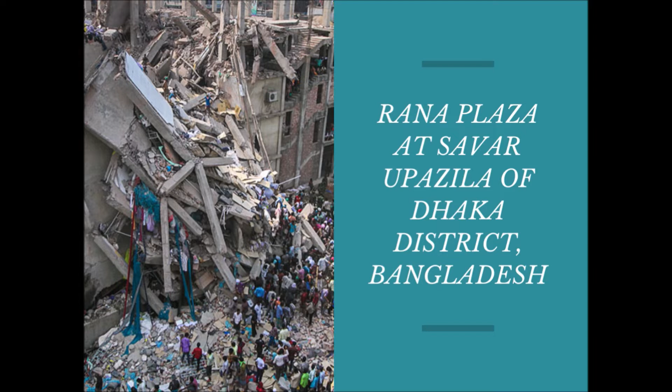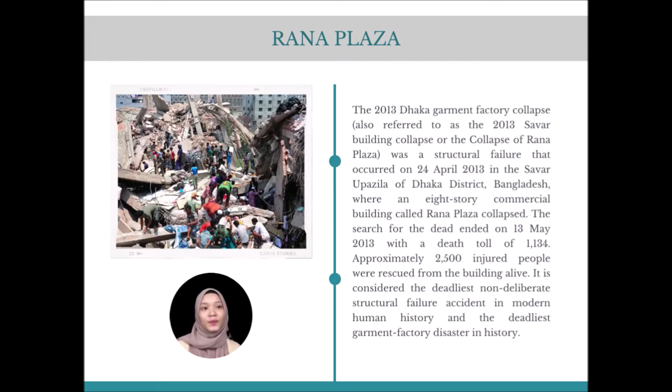Me and my group members are going to talk about failure projects in the construction industry. I'm going to talk about the first issue: Rana Plaza at Savar Upazila of Dhaka district, Bangladesh.

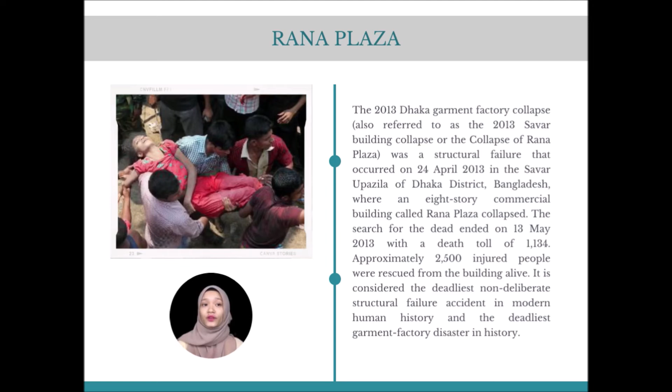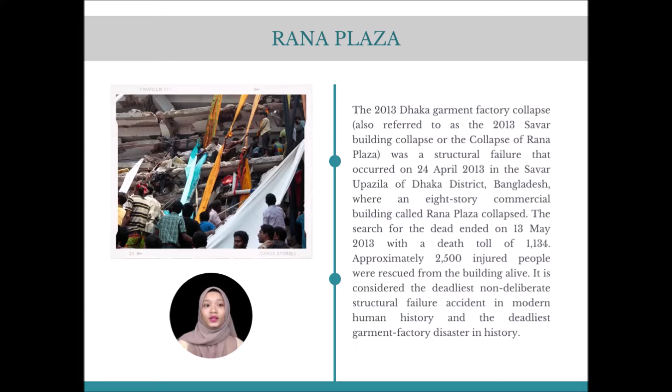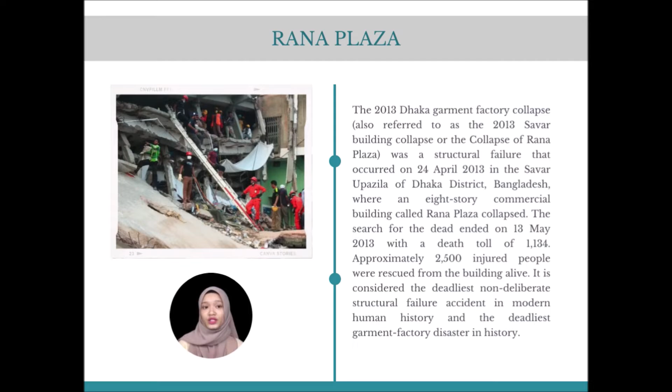The Dhaka garment factory collapse was a structural failure that occurred on 24 April 2013 in the Savar Upazila of Dhaka district, Bangladesh. An 8-story commercial building called Rana Plaza collapsed. The search for the dead ended on 13 May 2013 with a death toll of 1,134. Approximately 2,500 injured people were rescued from the building alive. It is considered the deadliest non-deliberate structural failure accident in modern human history and the deadliest garment factory disaster in history.

Problem statement: the collapse of the building was preceded by a number of management failures, leading to early warning signs being ignored. It was reported that the industry police first requested the evacuation of the building until an inspection was conducted. It was also reported that Abdul Razak Khan, an engineer, declared the building unsafe and requested building authorities to conduct a more thorough inspection.

He was arrested for helping the owner illegally add three floors. It was also reported that Kabir Hossain Sardar, the Upazila Nirbahi Officer who visited the site, met with Sohel Rana and declared the building safe.

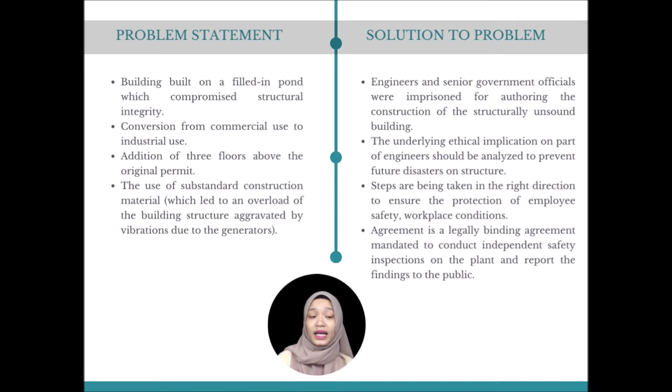Sohel Rana told the media the building was safe and the workers should return to work the next day. One manager of the factory in Rana Plaza reported that Sohel Rana told them the building was safe. The manager then requested the workers go back to work, adding a threat to withhold a month's pay from workers who refused to come to work. As a result, workers returned to the factory the next day and the building collapsed.

Lastly from me is discussion. Company failure not only disrupts the industry badly but can also cause significant ripple effects in the economy. Construction companies are prone to bankruptcy due to the fragmented nature of the industry and high competition.

It is important for management to identify any problems and failures that may occur during the construction project, or after the construction project is complete, at an early stage. All possibilities must be taken into consideration so that destruction and loss do not occur. What is more worrying is the loss of life due to the faults of irresponsible and selfish humans.

Management needs to provide the best implementation, as well as knowing the materials and having qualified officers to provide a complete synthesis of construction, in accordance with national acts and laws, before starting construction.

We also need to study the common causes of construction company failure. Using the results of this study, it's hoped that construction companies will be better able to prevent failure, and that it will be relevant to the current needs of the construction industry and important to society.

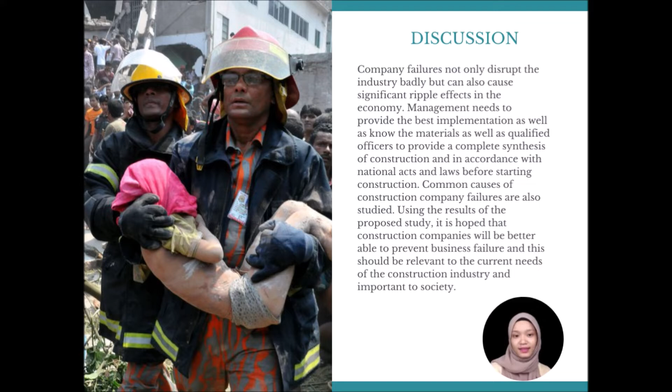On 16 January 2010, the roof of the new building of Sekolah Menengah Taman Connaught Cheras, which was under construction, collapsed when the tile roof installation work was being done. The incident happened at about 4 p.m. The main cause of this incident was that construction workers placed a pile of tile roofs in one area only. This caused the load to be too heavy, so the support truss at the front of the building could not support it and it collapsed.

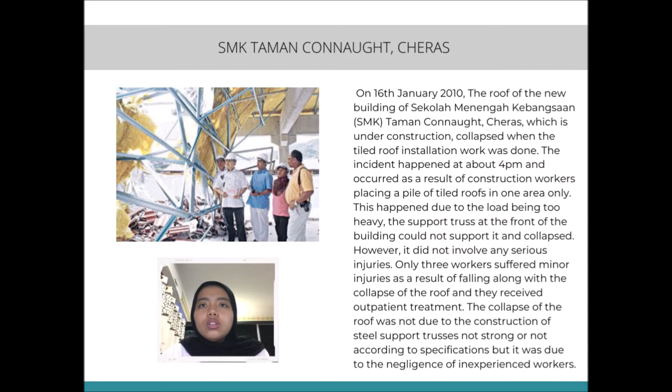However, it did not involve any severe injuries, only 3 workers suffered minor injuries. Actually, the collapse of the roof was not due to the construction of the steel support trusses being not strong or not according to specification, but it was due to the negligence of inexperienced workers.

The problem statement of this incident: firstly, no monitoring by a superior after construction work is done each day. Next, the negligence of inexperienced workers. And third, the construction workers collected the tiled roof in one area only, causing the load to be heavy and collapse.

Solution to the problem: the superior needs to monitor the general work environment at the end of each day of work. Second, the contractor needs to ensure safety aspects and rules at work are complied with by the employees. Third, the contractor must comply with work procedures guided by the National Institute of Occupational Safety and Health (NIOSH) regulations on the level of safety in the workplace.

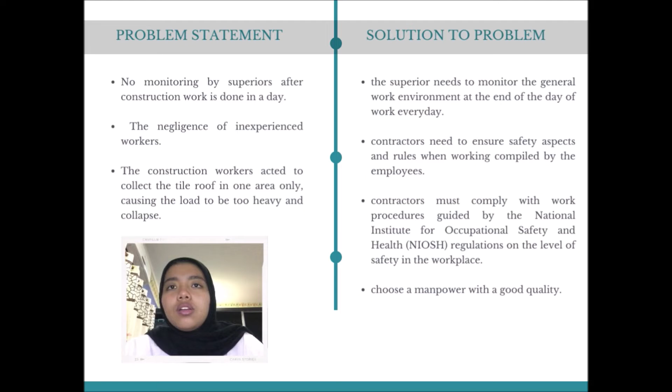Last but not least, choose manpower with good quality.

For the discussion, based on this incident, we cannot blame 100% the workers. One of the solutions is that the employer also needs to be responsible and put effort into monitoring the work environment every day, so that employers can rebuke mistakes made by the workers.

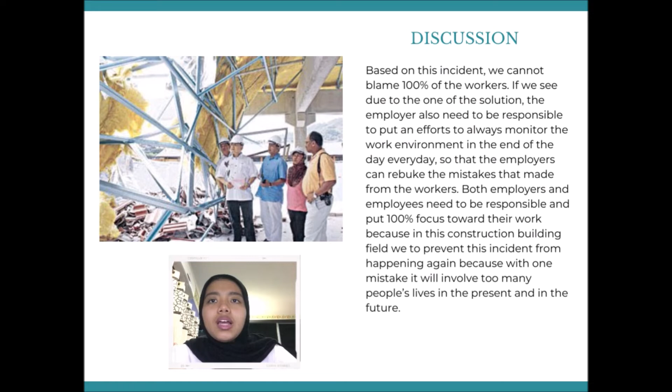Actually, both employers and employees need to be responsible and put 100% focus towards their work, because in this construction building we need to prevent the incident from happening again, since one mistake will involve too many people's lives in the present and in the future.

The Glomac Centro Selangor project began development on February 19, 2012, with a targeted completion date of June 31, 2016. However, the project faced problems and was completed on June 31, 2017.

Building material delays are caused by a range of reasons, including suppliers, location, transportation, and logistics. The arrival of building materials is delayed by 1 to 15 days.

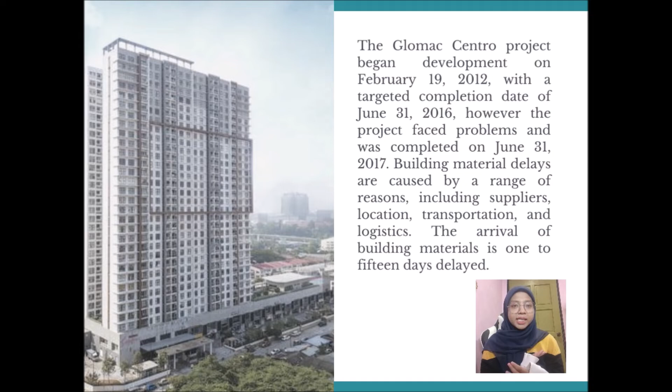There are two problem statements. Number one, on a regular basis, materials arrive late at the building site. Number two, the method of settling that the contractor will apply on the construction site.

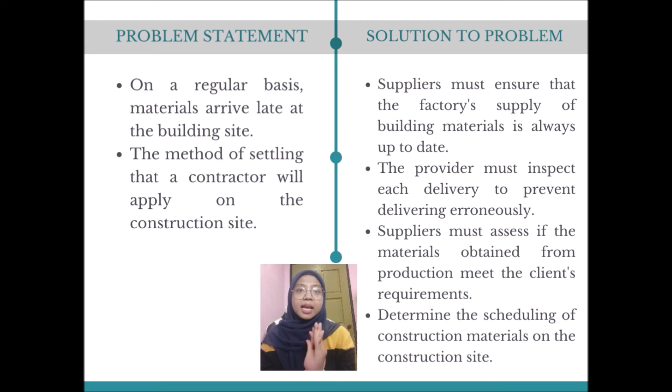The solution to the problem: firstly, suppliers must ensure that the factory supplies of building materials are always up to date. Secondly, the provider must inspect each delivery to prevent delivery errors. Thirdly, suppliers must assess if the materials obtained from production meet the client's requirements. And lastly, determine the scheduling of construction materials on the construction site.

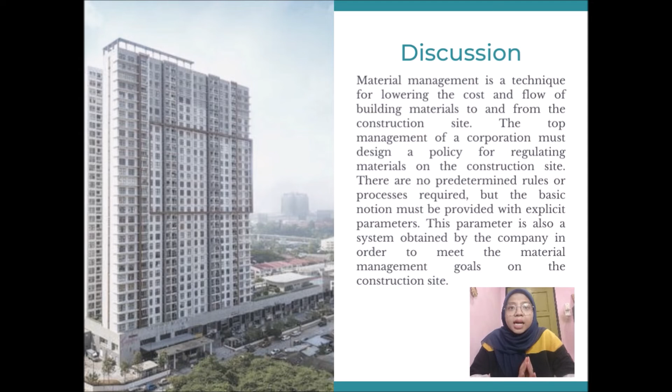Material management is a technique for lowering the cost and flow of building materials to and from the construction site. The top management of a corporation must design a policy for regulating materials on the construction site. There are no predetermined rules or processes required, but the basic notion must be provided with explicit parameters. This parameter is also a system obtained by the company in order to meet material management goals on the construction site.

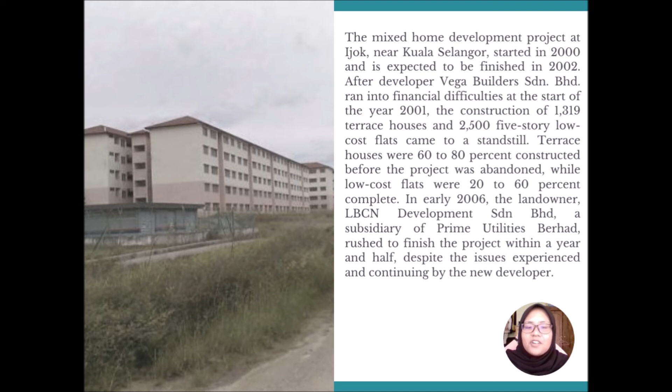Terrace houses were 60 to 80% constructed before the project was abandoned, while low-cost flats were 20 to 60% complete. In early 2006, the landowner LBCN Development Sdn Bhd, a subsidiary of Prime Utilities Berhad, rushed to finish the project within a year and a half, despite issues experienced and continuing by the new developer.

Next, the problem statement. The developer Vega Builders Sdn Bhd ran into financial difficulties, due to the contractor's unstable financial background and lack of regular cash flow forecasting. Delay in paying contractors will subsequently jeopardize the contractor's cash flow.

Delay in payment resulted in slow progress on site, as many subcontractors and suppliers were subjected to financial difficulties. Hence, no materials were delivered to the site.

So the solution to the problem is that the developer needs to create and adhere to a fixed payment schedule for invoicing operating expenses, material costs, etc., which is essential for effective cash flow management.

Another solution is that cash flow forecasting can also identify cash shortages and surpluses. This helps the business anticipate and manage its cash flow appropriately, holding extra money when business is slow.